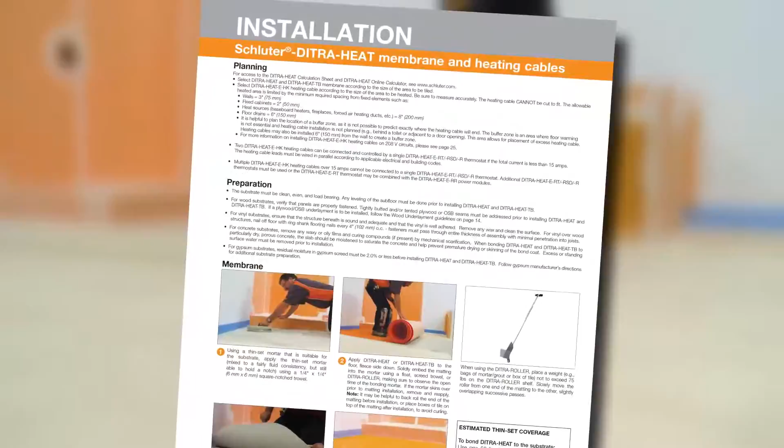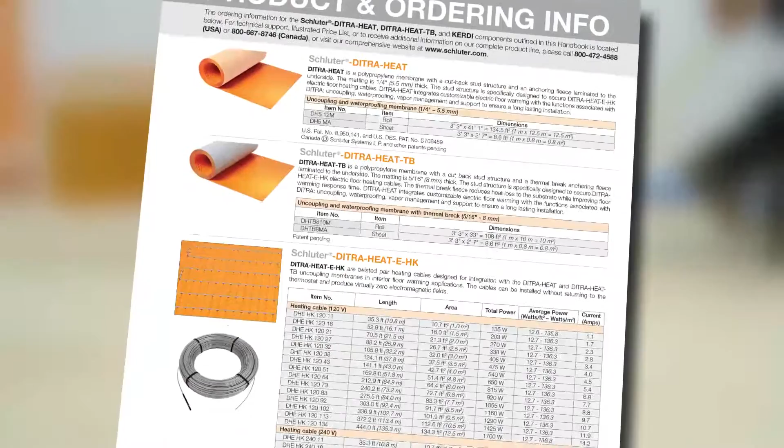The Schluter Ditra-Heat Installation Handbook includes comprehensive installation guidelines and warranty criteria for the system. After finding the applicable detail and confirming that all requirements can be met, we start planning the required materials and quantities.

Tape has been applied to the floor in the areas where fixtures, such as vanities and the toilet, will be located. The Ditra-Heat or Ditra-Heat TB uncoupling membrane is applied wherever tile is to be installed, typically over the entire floor. Measure the floor surface to receive tile and calculate the corresponding area. Select a sufficient quantity of membrane to cover the area.

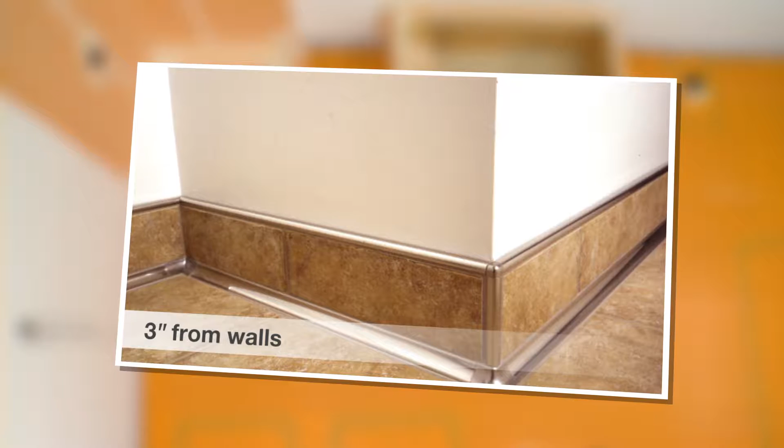The heating cables may be installed to produce customized zones or throughout the room. Unlike the membrane, heating cables must be spaced a minimum of 3 inches from walls and fixtures, 2 inches from fixed cabinets, 8 inches from other heat sources, such as baseboard heaters or fireplaces, and 6 inches from floor drains.

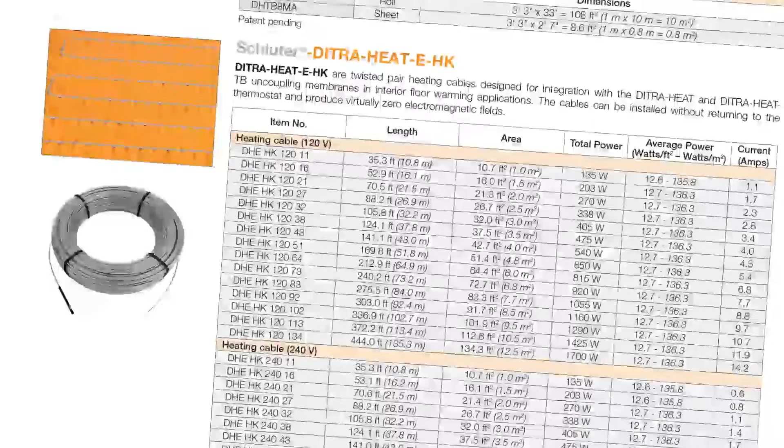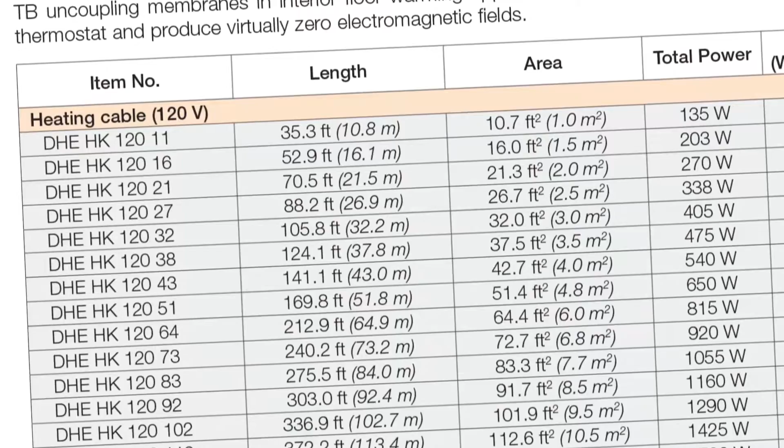Measure the section or sections to be heated and calculate the corresponding area. Select the heating cable that most closely matches but does not exceed the area to be heated. For example, if a 35 square foot area is to be heated, select the heating cable with 32 square foot coverage, rather than the heating cable with 37½ square foot coverage. The cable cannot be trimmed or shortened to fit.

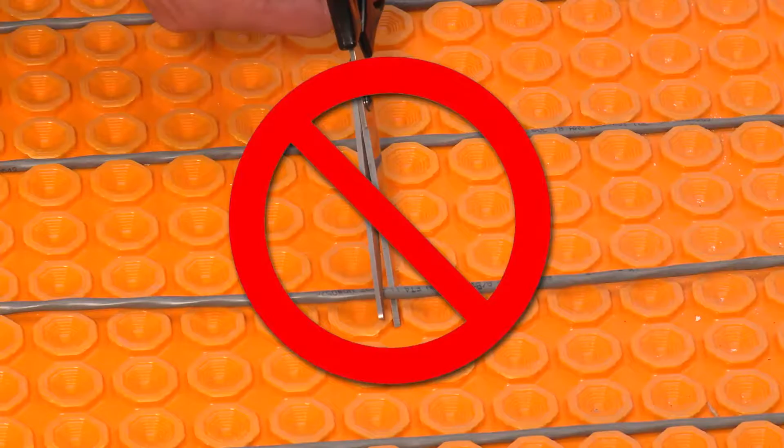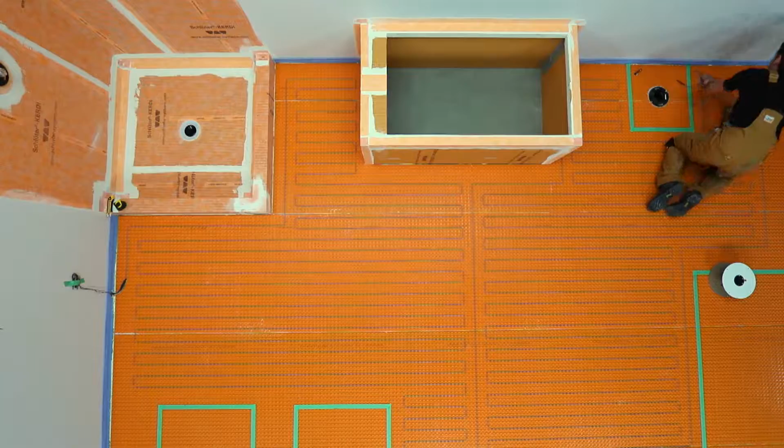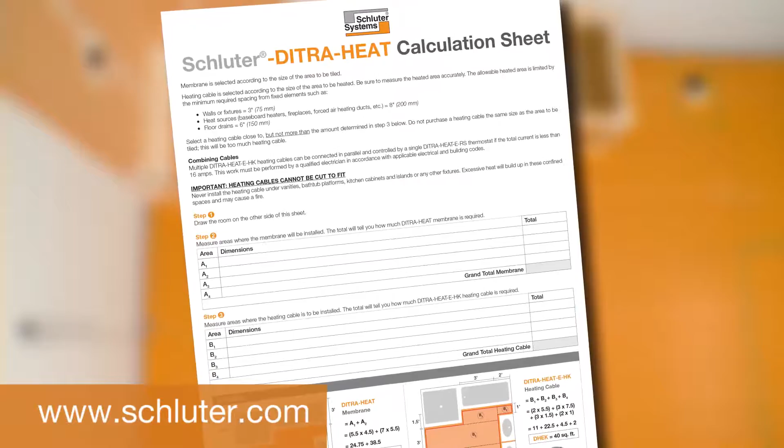Any excess cable can be installed in a buffer zone. This is an area where floor warming wasn't planned and space for cable overrun was provided. For example, behind a toilet or adjacent to a door opening. Heating cables may also be installed 6 inches from the wall to create a buffer zone. Visit schluter.com to use our Ditra-Heat calculation sheet and our online Ditra-Heat calculator to help with your project layout.

The electrical preparation has already been completed. A dedicated circuit has been run to the thermostat electrical box. A single-gang deep electrical box or a double-gang electrical box with a single-gang mud ring is recommended to provide room for the wiring. The remainder of the electrical preparation will vary, depending on the thermostat chosen.

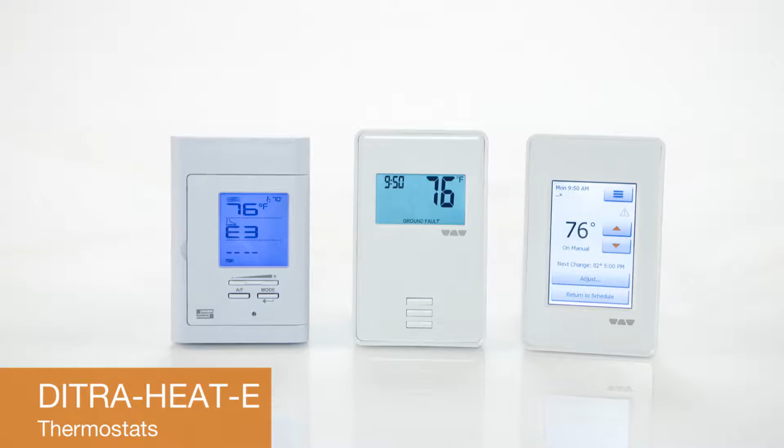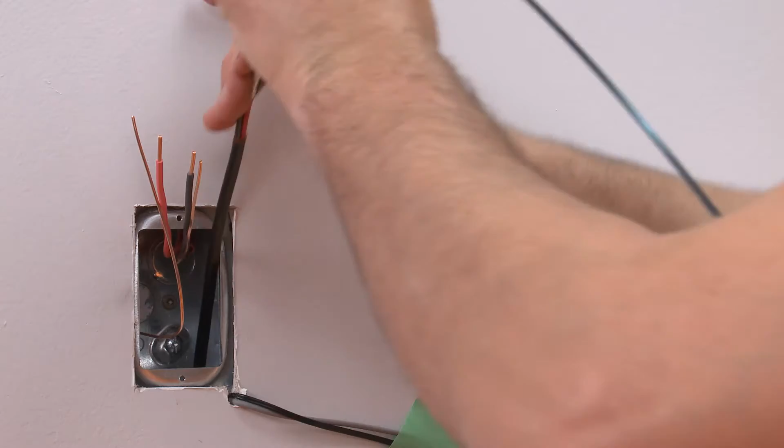When using the Ditra-Heat ERT or the Ditra-Heat ER thermostat, the preparation includes the following. Install a section of conduit from the electrical box to a hole at the base of the wall. The heating cable cold lead will be run through the conduit, while the floor temperature sensors will be run inside the wall and threaded between the electrical box and surrounding wall sheathing.

When using the Ditra-Heat ERSD thermostat, the preparation includes the following. If the thermostat will be mounted on a double-gang electrical box, install 2 sections of conduit from the electrical box to holes at the base of the wall. The heating cable cold lead will be run through one conduit, while the floor temperature sensors will be run through the other.

If the thermostat will be mounted on a single-gang electrical box, install 1 section of conduit from the electrical box to a hole at the base of the wall. The heating cable cold lead will be run through the conduit, while the floor temperature sensors will be run inside the wall and into the electrical box through a separate opening from the conduit.

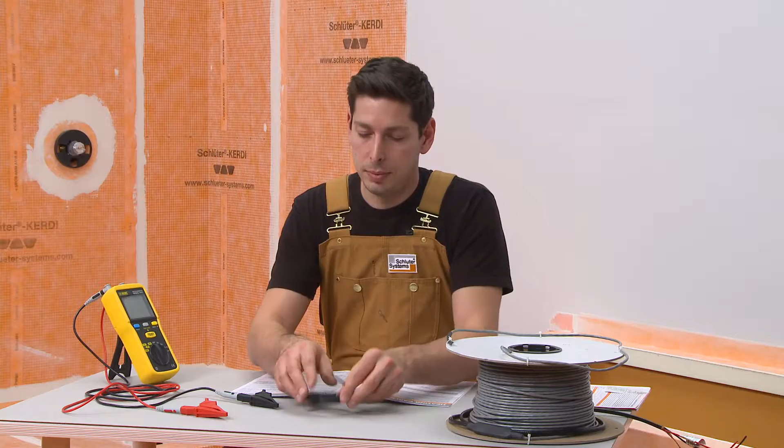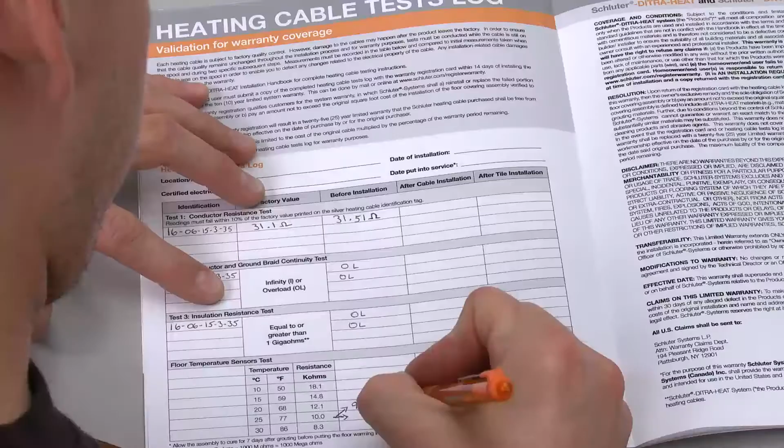Please note that the floor temperature sensors must be tested using an ohm meter or multimeter to verify accuracy prior to installation. The resistance will vary according to the ambient temperature. Connect the meter to the sensor leads and compare the measurement with the expected values in the heating cable tests log. Record the actual temperature and measured resistances in the tests log.

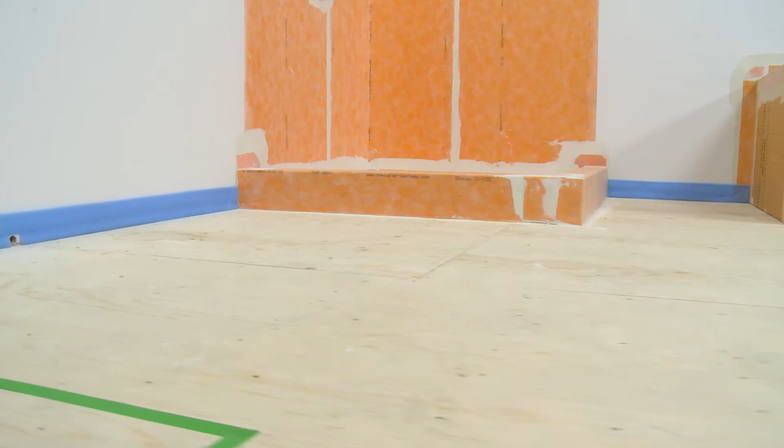Now, we're ready to prepare for the membrane installation. The substrate must be clean, even, and load-bearing. Any leveling of the subfloor must be done prior to installing Ditra-Heat or Ditra-Heat TB. Sweep the floor to remove any debris. For wood substrates, verify that subfloor panels are properly fastened to framing members. Tightly butted or tented seams must be addressed prior to installation.

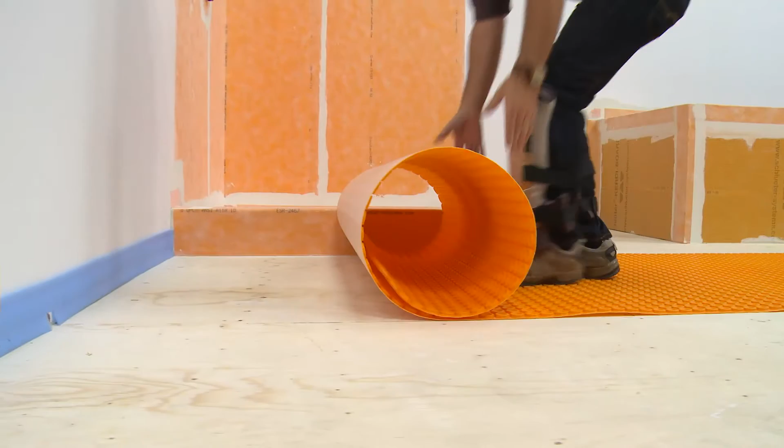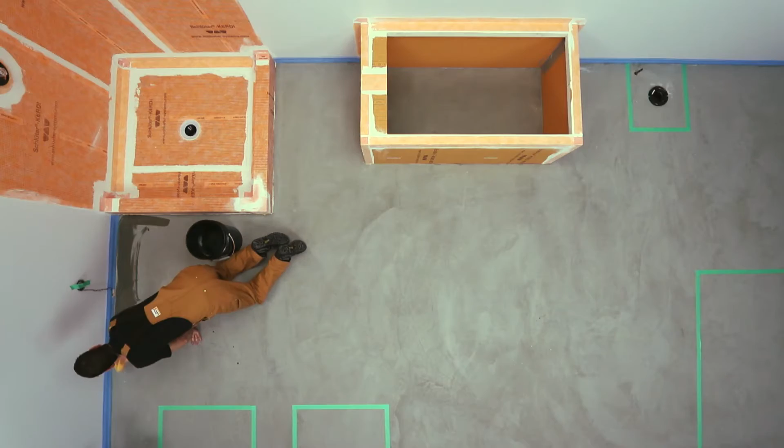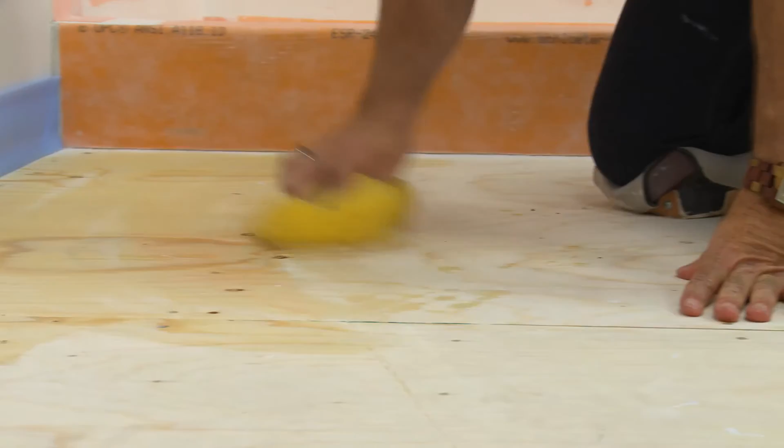For concrete substrates, remove any films or curing compounds by grinding. If the concrete is particularly dry or porous, moisten it to help prevent premature drying or skinning of the bond coat. Any standing water must be removed prior to installation. Clean any dust from the substrate with a damp sponge. Measure and cut the matting using a utility knife or scissors. The planning and preparation are now complete.